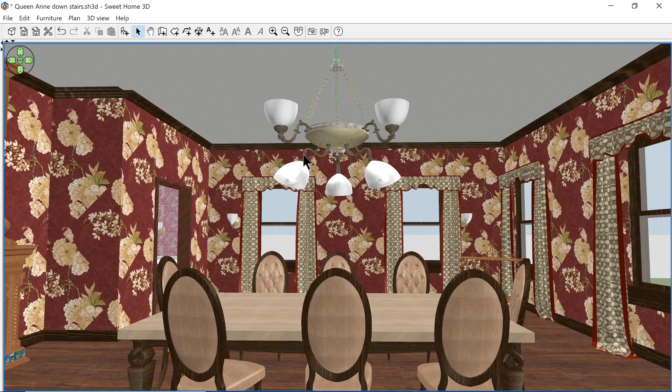I'm going to open up the side menu here in just a moment, and we're going to go to our light sources. If you use Sweet Home, you're familiar with this - there are icons represented by light bulbs. As a new user, it's kind of misleading. We think that maybe we can take that light bulb and it will do what we want it to do when we run the photo rendering. We just put it up in the chandelier that we're using here as our example, and it's going to work automatically - but that's not going to happen.

We'll show you how to do it - it's the same formula, so no matter if we're using the example here, we're going to be using some other examples in a moment. It doesn't matter - the examples change, but the formula is going to be the same.

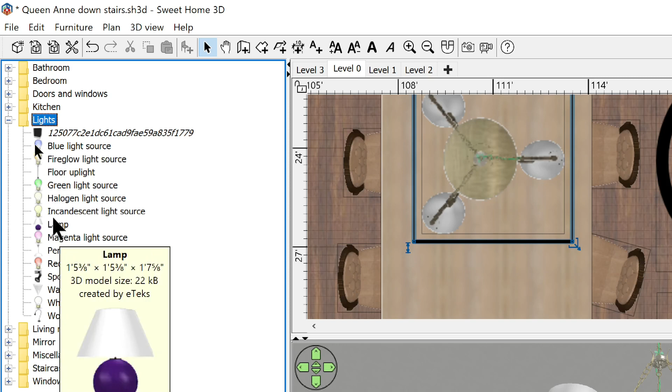So the first step in getting a nice render is you need to know the piece you're working with. We're working on a 20s style Gasolier that, these days, converts to straight electric because gas is not permitted anymore as far as chandeliers go. We're going to be working with the bottom and most exclusively the top - most of what we'll discuss today will be with the top.

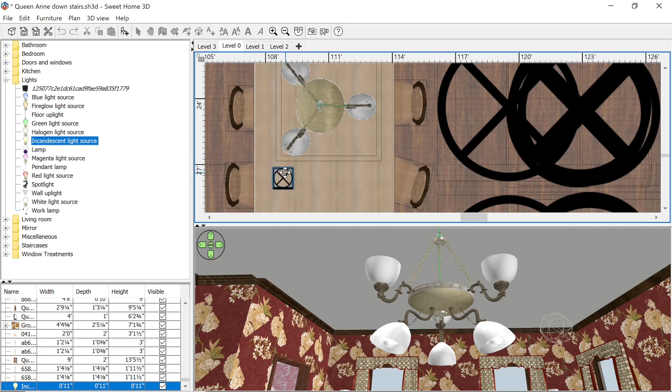We will set up the bottom, but it's at a 45-degree angle, so if you're a beginner to Sweet Home 3D, I wouldn't recommend starting there - we want to work with things that are vertical, like lamps, ceiling lamps, sconces, you name it. As long as they're vertical, you're just going around in a circle, which makes it easier for a beginner. If you're a veteran of Sweet Home and you've been doing this for 5-10 years, have at it. But anyway, let's go ahead and hop into this.

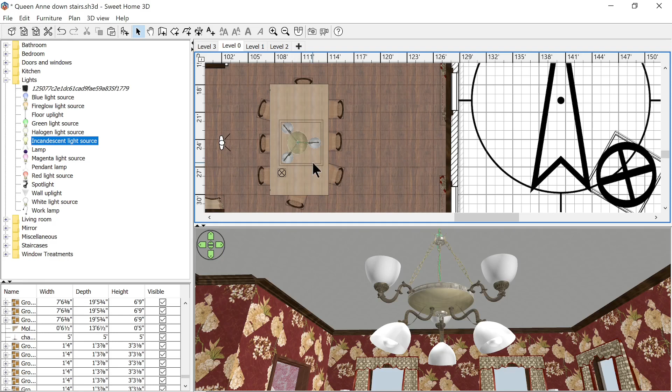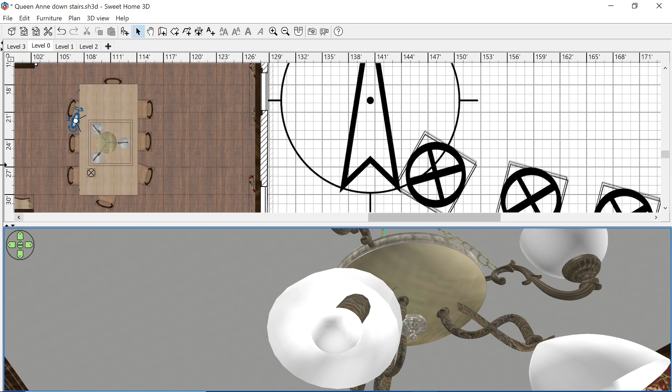We know this Gasolier probably too well, but we know it's going to take incandescent lights, so we're going to set that up here and go into the menu. As soon as we set our height, we'll grab an incandescent bulb and start there. Getting back to the formula - what we want to do is illuminate the things we'd like to illuminate.

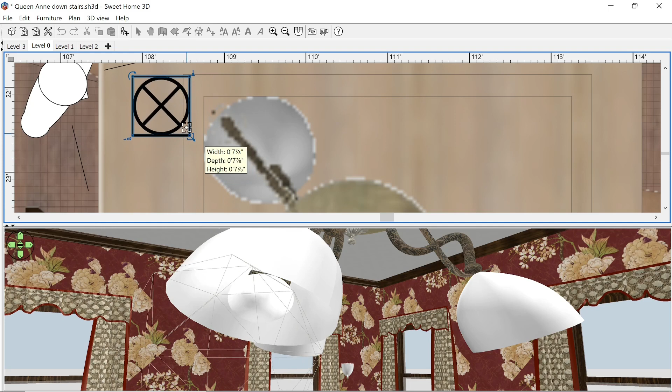Once we do that, we're going to go into our side menu, highlight them, and press Control Shift G, which groups them. That means when we do the next one, we don't have to start all over laying the light sources down again for each one - we just Control C, Control V to copy and paste and set up the next side. Once we're happy with how this looks in the photo rendering, we can group it, then Control C, Control V, copy paste, and put it on the next arm of the chandelier.

So again, we're going to illuminate the light bulb - that's one. We're going to need to illuminate the frosted white shade - that's two. And we're going to need to illuminate the immediate area around the chandelier as well - so those are three things that we need to illuminate.

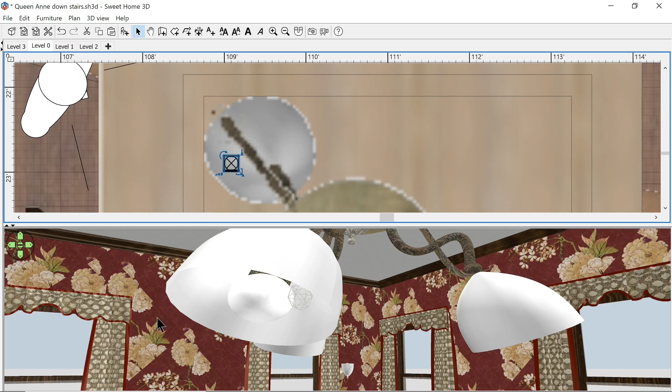So let's do this - we have the light source here, and what we want to do is get in close proximity to the object we'd like to illuminate, which in this case is the incandescent, or the light bulb. We're going to go all the way around, overlapping as we lay this down. Normally you'd be going in a circle, but we have to adjust and elevate each light source - so again, I wouldn't recommend this for a beginner. But the formula is going to be the same: we're going to go around and encompass the light source or the light bulb, cutting around it.

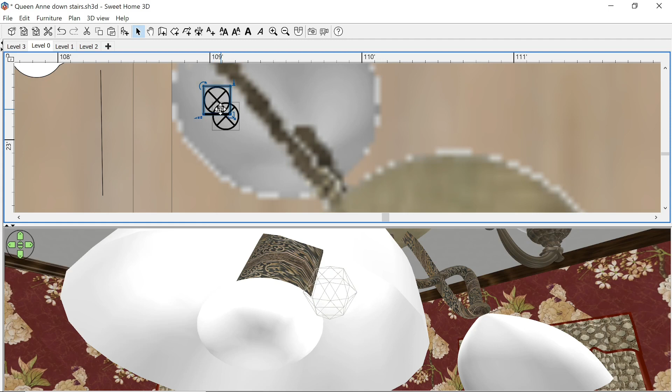We're going to cut forward here because we're not going to show this whole thing, it would be boring. But as you can see, there it is. They're all overlapped. Some of them are kind of sticking out a little bit, but the light sources are pretty forgiving for stuff like that.

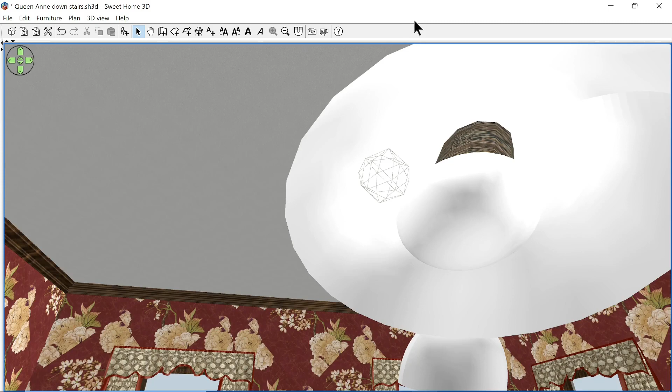So anyway, we're going to run a photo render. We want to see what this looks like, and if we're happy with it, we'll group those light sources and we'll move on. So there we go.

So as you can see here, there's a little bit of dead space, dark space underneath the light bulb. So it means two things: either we've clipped, or we need another light source there. And that will smooth everything out so you won't have any dark spots underneath that light bulb.

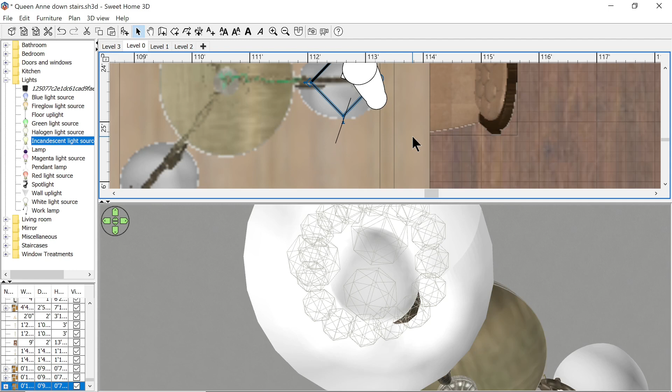So we'll go back to the application here. We'll add another light source there. I'm just trying to look to see if we clipped with the first one. It's really hard to tell, but anyway, this is another thing we want to work with here.

Now we're going to group these because we're happy with it. So again, we're going to go to the side menu there and highlight those. Just click on them, hold Control, I believe, and then Control Shift G, and then we can copy paste. And that's what we've done here - we've copy pasted, so we didn't have to do that thing all over again. And that looks fantastic, that looks great.

So now we can move on to the next thing that we'd like to illuminate, which is the white frosted globes or shades encompassing the light bulb here. So let's do that - same formula. We're going to overlap and go all the way around, and then we'll do the same with the tops too, because the top is the main focal point of this video.

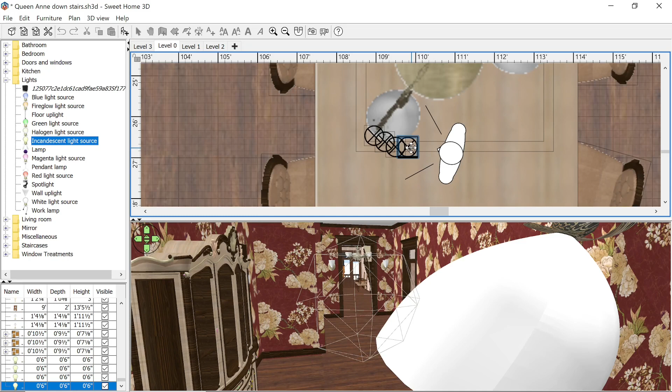Because again, this is more advanced because we're going on a 45-degree angle. Again, I'm going to group these. I have them all highlighted here. I'm going to hit Control Shift, I believe. Yeah, Control Shift and G. It's like riding a bike. Right? Control Shift and G, and you can group them.

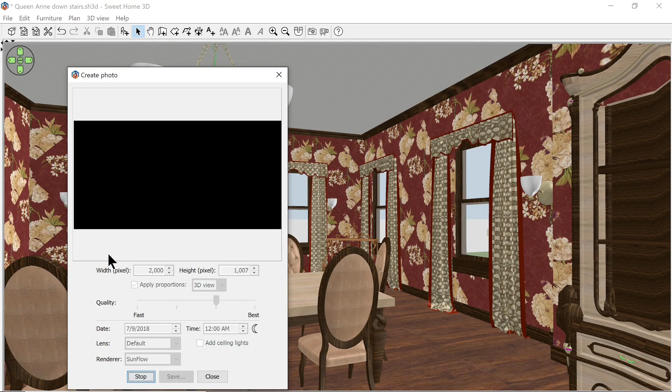And once you group them, you can copy and paste. Now, I'm going to run a photo render here, but in regards to the percentages, they don't equal wattages. So it's not like, okay, I'd like the bulb to be 75 watts, so I'm going to set the percentage to 75. No, you want to keep it low and then build up. So start at 2 or 3 and build up.

As you can see here, that doesn't look too bad. We do have to work on it, but that's something we'll do off camera, because again, that's not really part of the tutorial, because we're, again, for the third time, we're on a 45-degree angle.

So there's a lot to unpack though with the top. A couple things are wrong here. Number one, there's some clipping going on - you see the little dots at the top tier of the chandelier. Second problem is that the group set is too high on each arm of the chandelier, so we need to lower that group set down a little bit. And number three is that it's too dim, so we need to bring the brightness up a little bit.

Okay, we're not trying to brighten the room, we're just trying to brighten the shade, because we'll do the room in a moment. Let's go back into the application and fix that stuff.

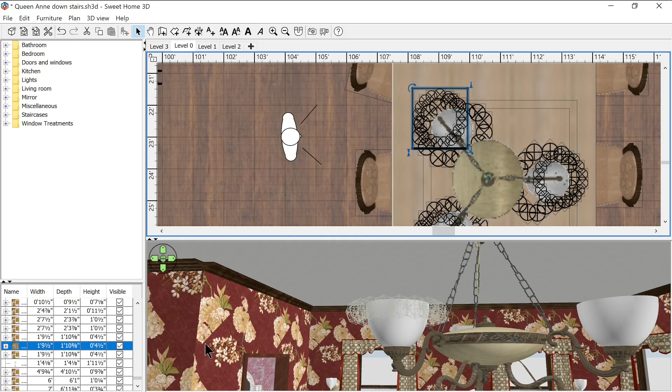So we want to ungroup, which is Control Shift and U, and that'll ungroup it, because you can't change the brightness until you ungroup. Now I'm going to do that in a second. When we want to highlight this, we want to go to the side menu to highlight it, and then once we do that, we can use the tabs here. But we really never want to go here and then click on it, because you could move it by accident and then you wouldn't be happy.

So we don't want you to be unhappy. So now I'm going to go ahead and lower the elevation. And it goes without saying, you do one for this one, you have to do it for the other ones. All right, it goes without saying, but because it is a tutorial, we have to say that.

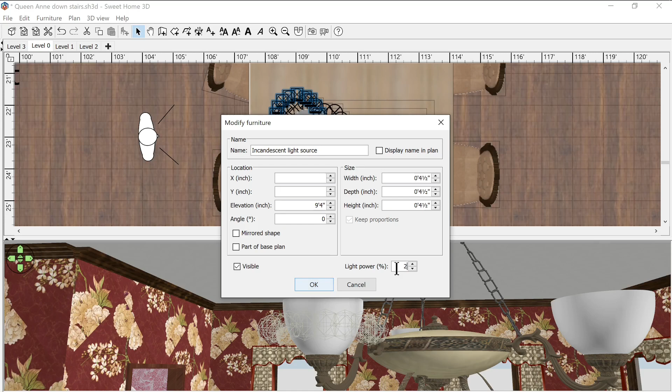So now that I'm happy with that, I'm going to, off camera, Control Shift U, ungroup so I can change the brightness right here. And of course I did that on camera - see, I contradict myself all the time. It's fine now, it's fine.

Okay, so now that's done, I'm going to Control Shift G and regroup that. Now I've ungrouped this on purpose to show you - if you do this, they should all be highlighted, and they're not. So I'm going to Control Z, or just right click on the top down part, and then hit the undo tool. That is a tongue twister and a half, I'm not going to say that again, sorry.

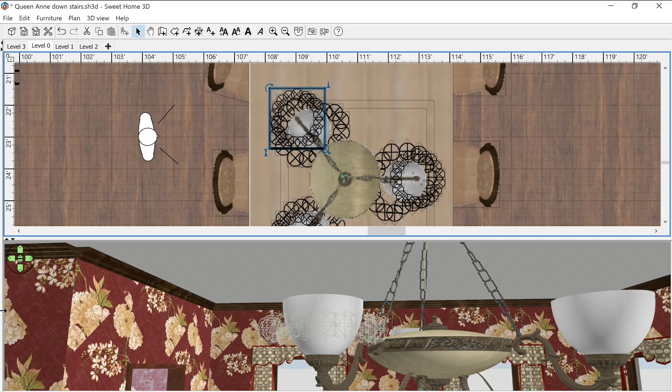And you can undo it, and then Control Shift and G, you can regroup it. So if you make a boo-boo, you can always undo and try to fix it. Again, this is just a guide, this is not an end-all be-all. But as you can see there's the tops - they look better. They're very slightly overexposed or oversaturated, so we're not looking for that. We still want to see a little bit of the model there, we want to see that frosted white shade.

So I think in the next clip maybe we fix that. So that's a little bit better, that's a little bit better. Again, there's a lot we have to do between that. It takes time, okay, it's not willy-nilly. If you're looking for willy-nilly, that's what you're going to get. This is not the video for willy-nilly here.

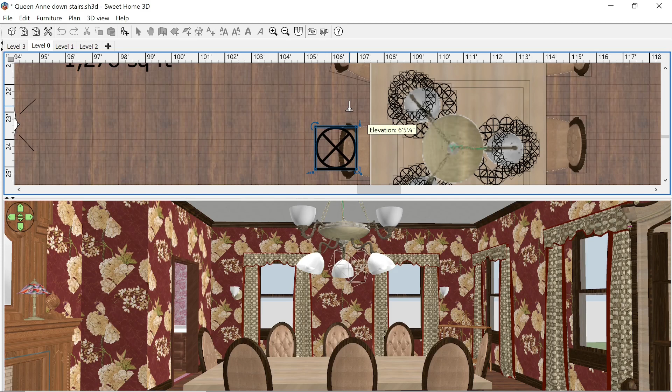So just so you know, this does take time. When you're doing the photo rendering, you can go do chores or laundry or something like that and come back to it, because the photo rendering takes the time. We have our resolution up pretty high, but the computer does it pretty quickly.

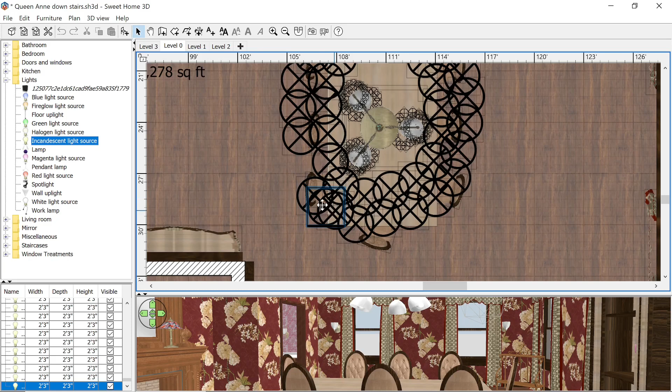We got our new PC that was back ordered, but we got it, so we can now move around the house a little freelier. Freelier? That's not a word. A lot more freely than we were. If you look at that Queen Anne Victorian tour video, you can see we're moving around like 10 FPS, it was terrible. Anyway, so I'm going to shut up and we're going to go through the whole stages here, what we just did.

And as you can see there, that's not bad. Again, we need to work on the bottom tier. Okay, kind of like that - the one's dim and the one isn't. I don't know, kind of neat, kind of shows its age. Anyway, let's move along to another example.

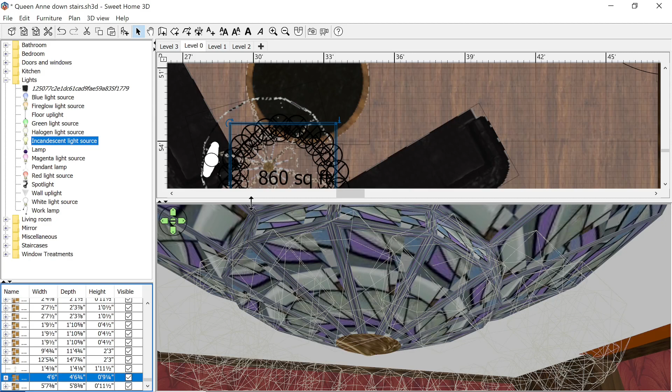So this is over in the den. You can see we have 2 tiers of ceiling lamp, and 2 tiers of light sources to highlight the ceiling lamp, and this is the stages right here. Now I'm going to talk through this because we're dealing with stained glass, which is gorgeous - cannot wait to do a showcase for this house. But stained glass doesn't emit the same amount of light because it's not frosty white, right?

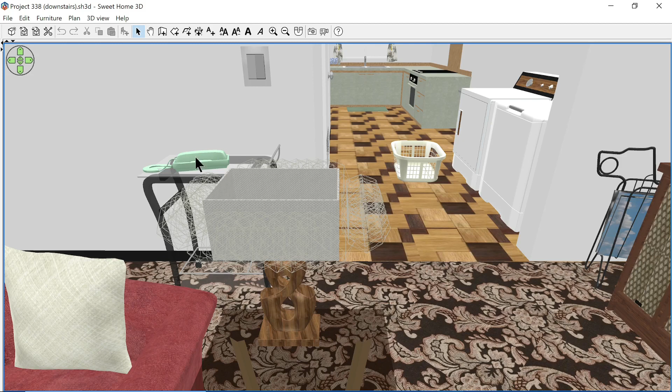It doesn't have that frosty white shade on it that most overhead lamps would have, so just have to bear that in mind. But that looks gorgeous, that's awesome - that's the family room, basically, is what that is. So moving on to the lamps, same formula - we're going to go around. If it's a taller shade, you may need 2 tiers, but you have to overlap them, top and bottom.

But that's going to conclude the video. Hope that helps you - again, it's just kind of some guide rails, and if you use that formula, it does work. If you have any questions, drop them in the comment and we'll get to them. Any concerns, drop them in the comments, we'll get to them. But with that, we're all set, all done with the video.